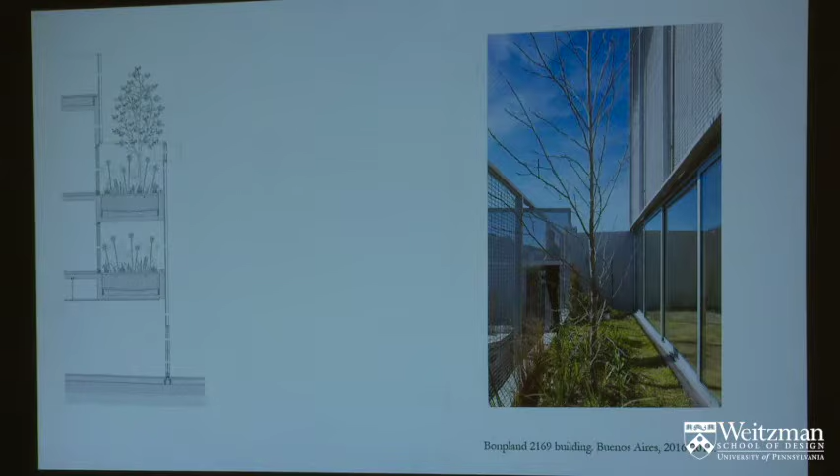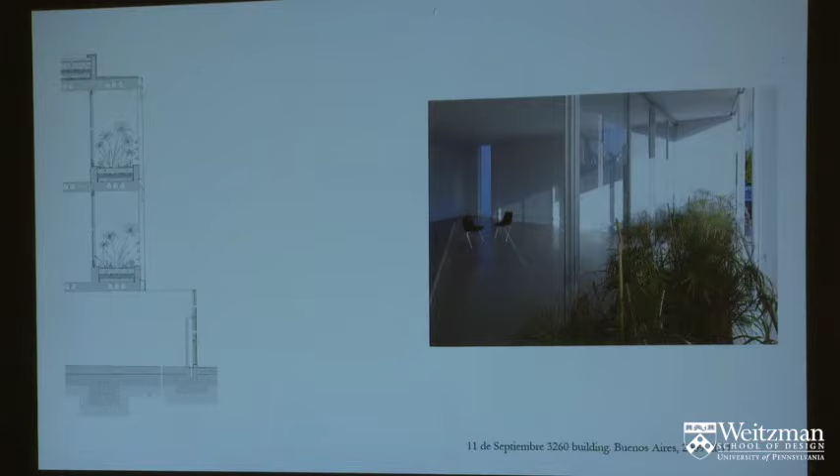Once the glass recedes from the perimeter, the outside envelope is no longer responsible for the waterproofing. This means it can react more freely to other exterior conditions. In this west-oriented building, a set of roller screen shutters control the sun radiation and the structure of the facade. It creates a kind of mixture: geometric Cartesian proportion from the outside layer, and picturesque shadow from the elevated gardens.

In this case, the translucent glass panels are blurring the presence of a big avenue. They work as a sound barrier. They calibrate the atmosphere of this elevated garden while helping to connect it with the park in front. You cannot see the windows from the outside. The building starts to look like stacked, semi-covered spaces.

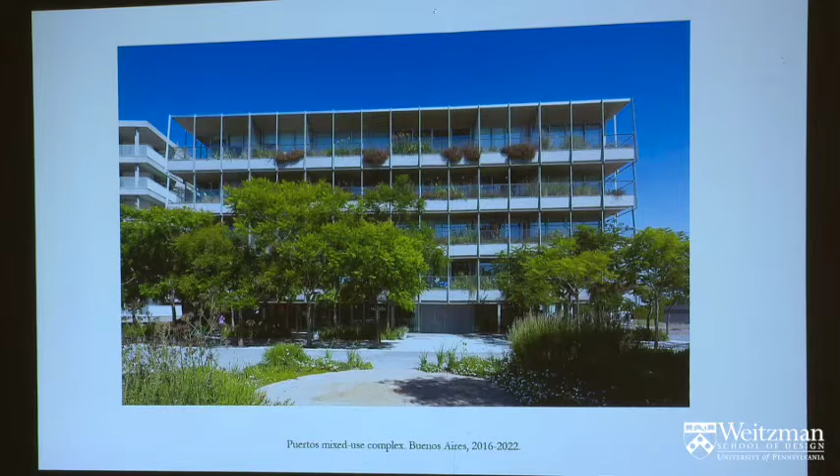This is a building that is again in front of a park, but with no avenue in between, so the exterior envelope becomes almost nothing. That almost nothing wraps all the plan and creates circulation and also the expansion of the units. With just a galvanized steel wire and the vegetation coming outside the building, the continuity here is more direct.

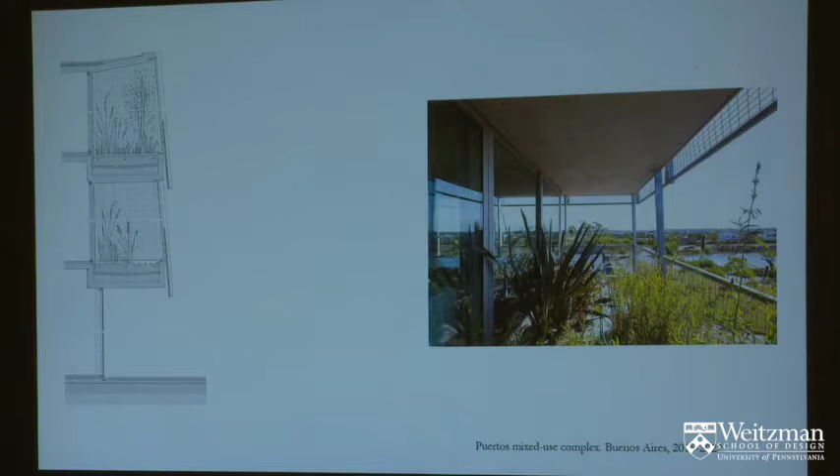I believe that architecture is a form of knowledge, otherwise we wouldn't be here. We have thousands of years of accumulated experience, through which we distill a great catalog of design technique. So I believe that progress lies somewhere between disciplinary knowledge and contingency.

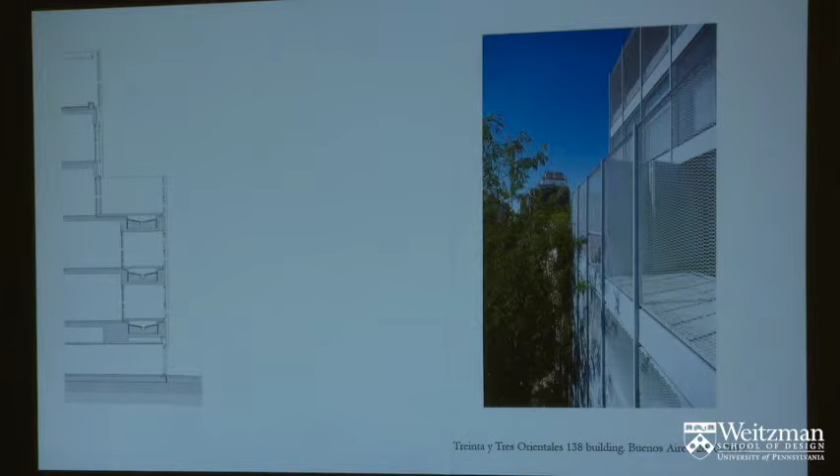The sun radiation, the heavy rains, the safety issues in South America create what we call this curtain wall actualization - what we refer to in the office as a ventilated curtain wall. That creates a lot of versions of this transitional space that help us create this new contract with the urban landscape.

I wanted to share this parking silo to conclude my explanation about this contract of architecture with the urban landscape. I'm using the word contract because it creates a two-way enrollment. In this artificial crust, in this density, architecture doesn't only relate to the landscape, it becomes the landscape - not only with gardens, because the continuity can happen with anything, and also, as we see here, with cars.

This is a truly ventilated curtain wall. It's a situation where you not only have to be careful with the water, but you have to let the air of the cars go through the building.

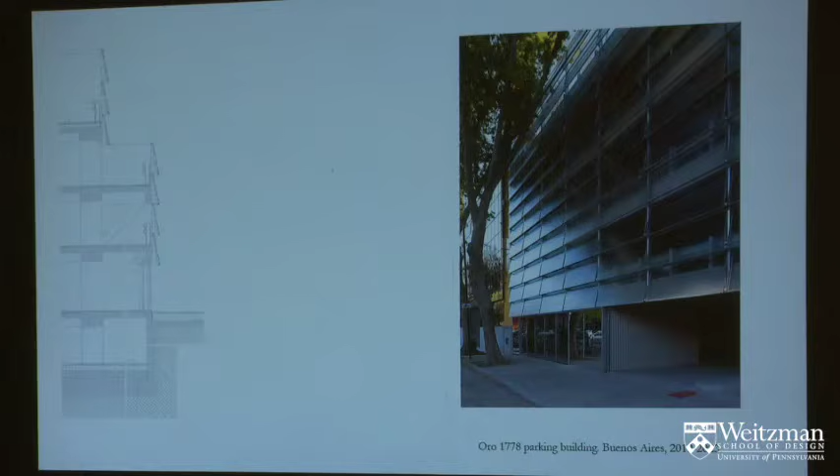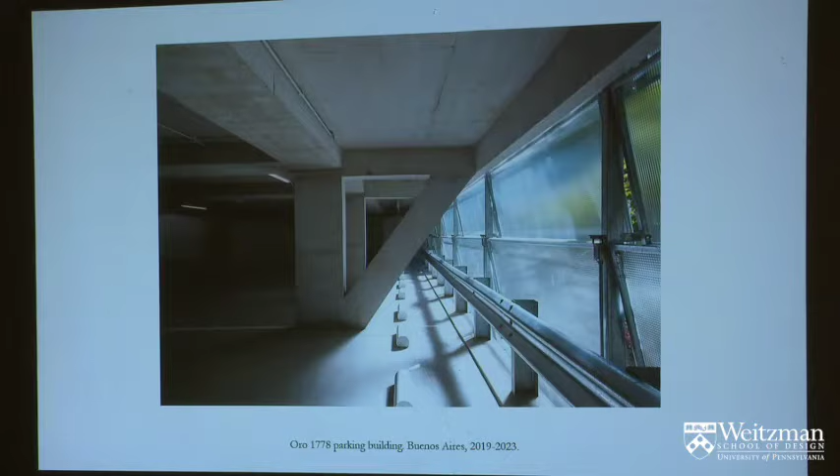It's a building that has only two elements, support and envelope, mostly built out of standard catalog materials. This helped me illustrate the idea that architecture can be a filter to relate ourselves with the world.

The second contract I want to present focuses on the relationship with the ground. We're used to thinking of architecture as the discipline that formalizes limits, shaping the division between public and private space, usually with a wall, a fence, or a simple step that defines control over the land. But in this dense city, architecture also has the power to blur that boundary, fostering a more permeable urban landscape, a more porous city.

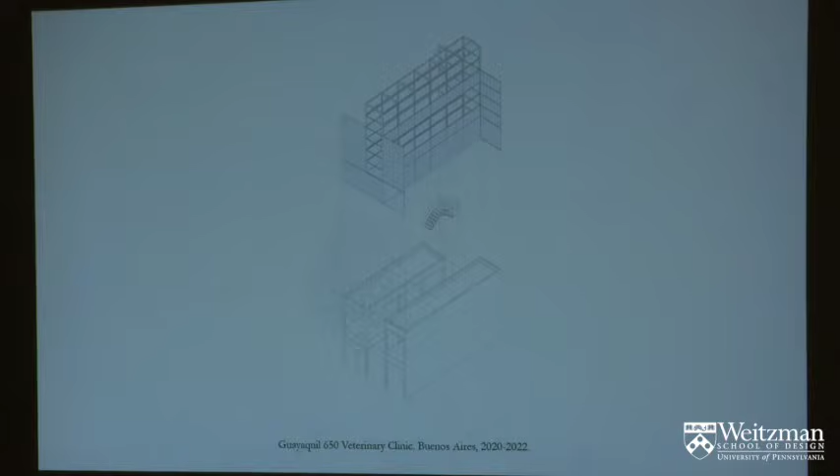This veterinary clinic connects the street and the center of the block through a new passageway. The story starts with an old house that we managed to maintain by only demolishing the central bay to create that passage. The passage is aligned with an existing tree, and as we see in the picture, we wrapped the existing building with corrugated metal sheets to resolve the insulation, the waterproofing, and the new identity of the veterinary clinic.

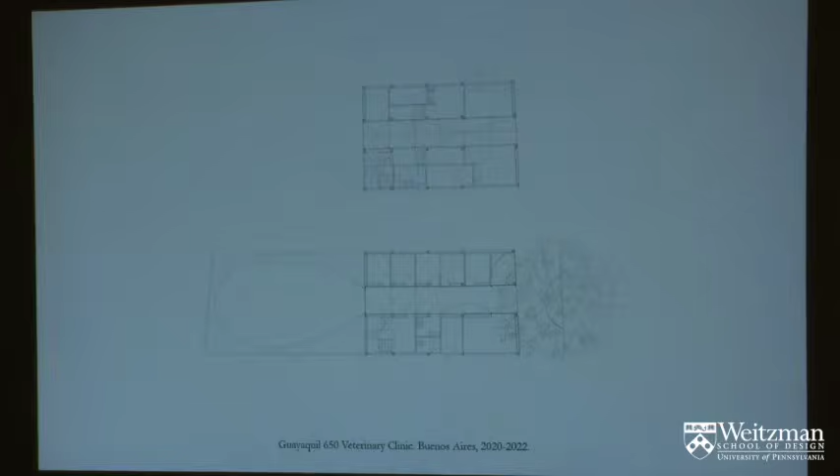On the ground level we have all the consulting rooms, and on the first floor the X-ray laboratory and operating room. But most important is that we have a patio, a new garden for a new community.

This is how the building looks from the outside, and this is the interior. It seems like the urban ground goes through the building, creating a permeable space protected from the rain with vegetation and a rough floor designed for pets. The consulting rooms and the rest of the veterinary clinic open into this passageway, and at the end there is a garden for a community of dogs and humans that demand greater spatial representation.

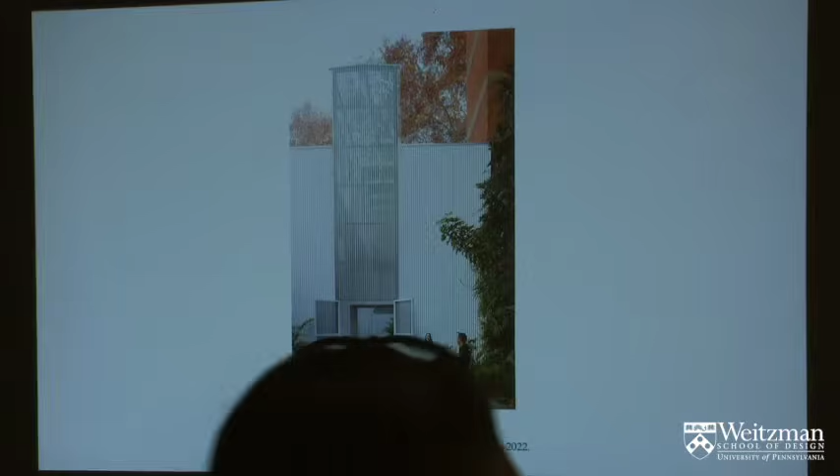This building happened in Buenos Aires because Buenos Aires is one of the cities with the highest dog-to-population ratio in the world. Yeah, we discovered that through this project.

Continuing with this contact with the ground, this horizontal and permeable pavilion has a dual responsibility. On one hand, it has to formalize the perimeter of the Di Tella University campus, and on the other, it must connect the academic life with the neighborhood.

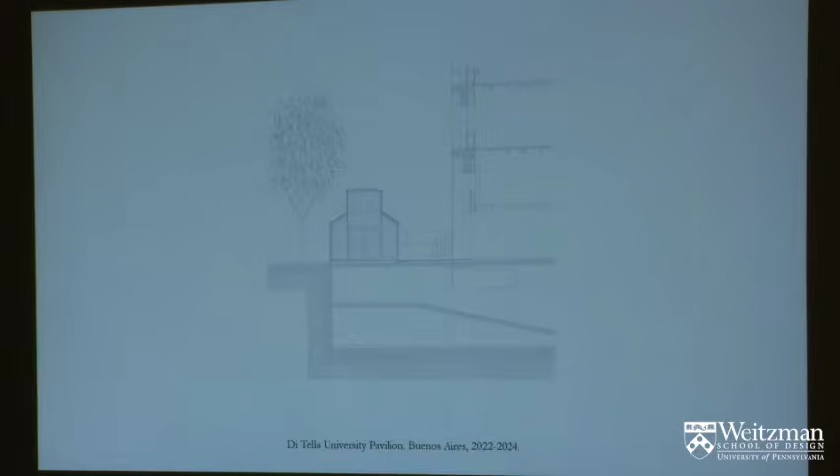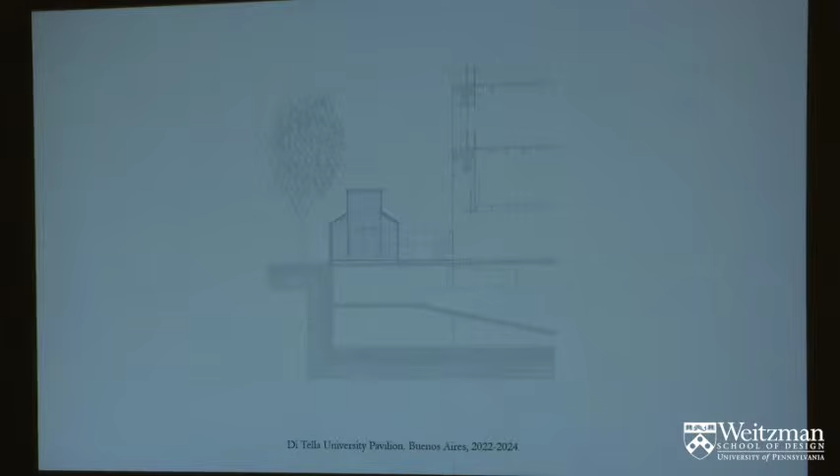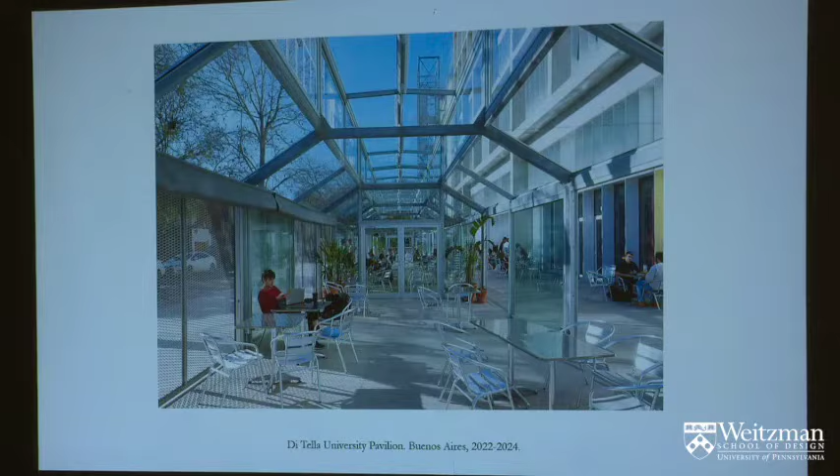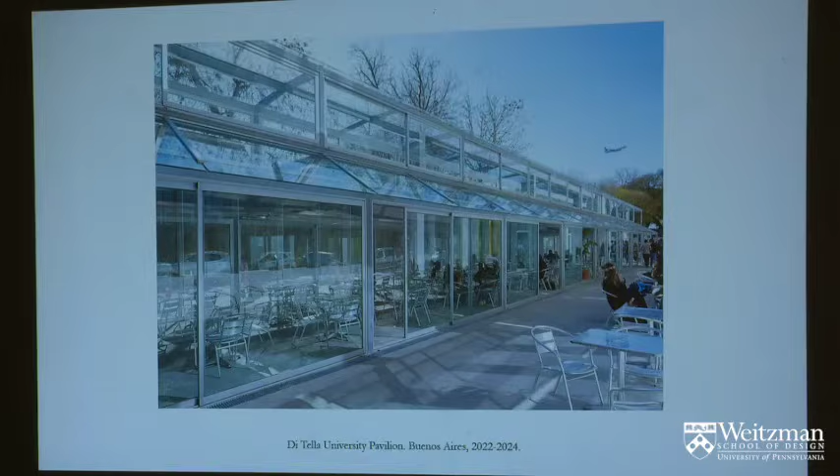The objective of this kind of architecture is to intensify the connection between the parts, promoting the integration of the university with the daily life of the city.

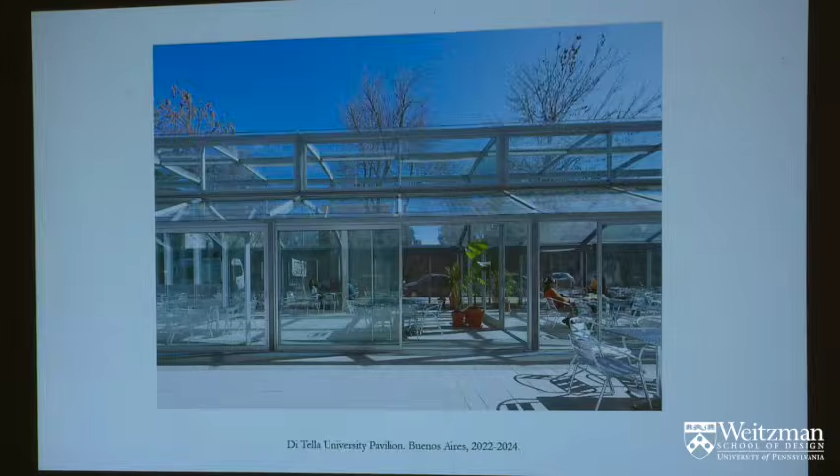It's a very systematic and pragmatic structure that offers itself as a meeting place where exhibitions like the one we see here can take place — moments where neighbors, students, and professors freely cross the property lines.

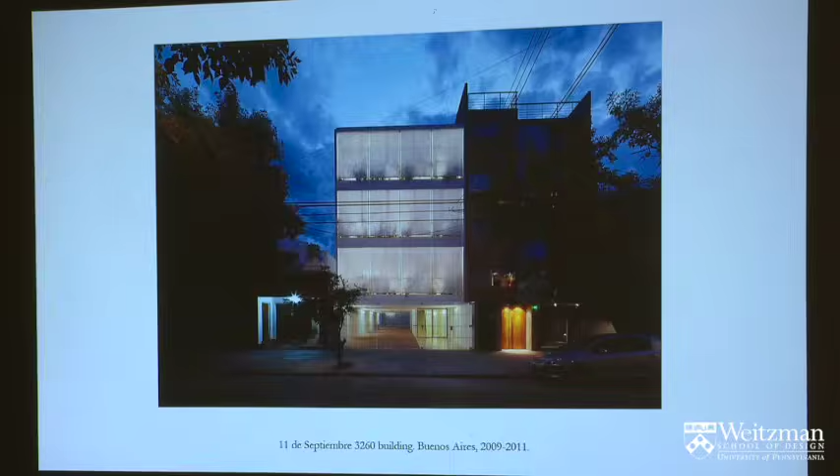As Le Corbusier announced a century ago, a car can be a good agent to erode the ground floor. So even in housing projects like this, without being accessible to the public, the views and the airflow improve the quality of the city. In buildings of this scale, cars have a huge influence on the ground floor organization.

So our approach is to find a way of coexistence. The programs in this case do not have a material translation — there's no specific floor for a pedestrian path, no specific kind of floor for cars. Everything is melded into one single space.

Because of that, because we treat cars as big pieces of furniture, you still have the biggest room of the building, which could be useful for so many things other than we expected.

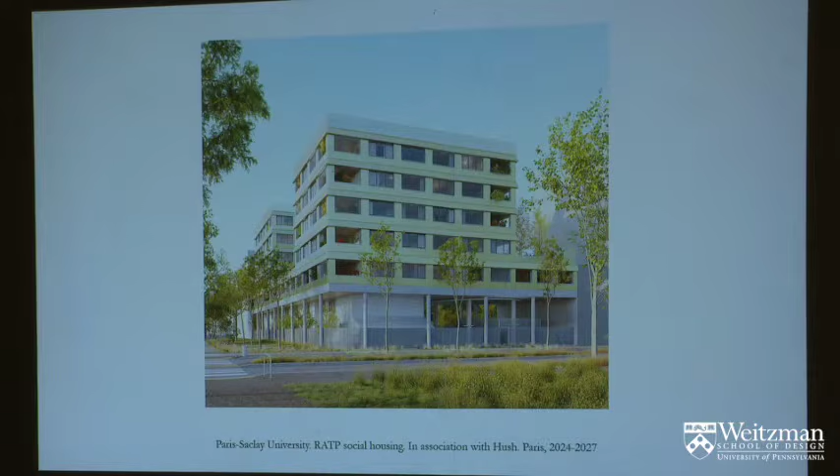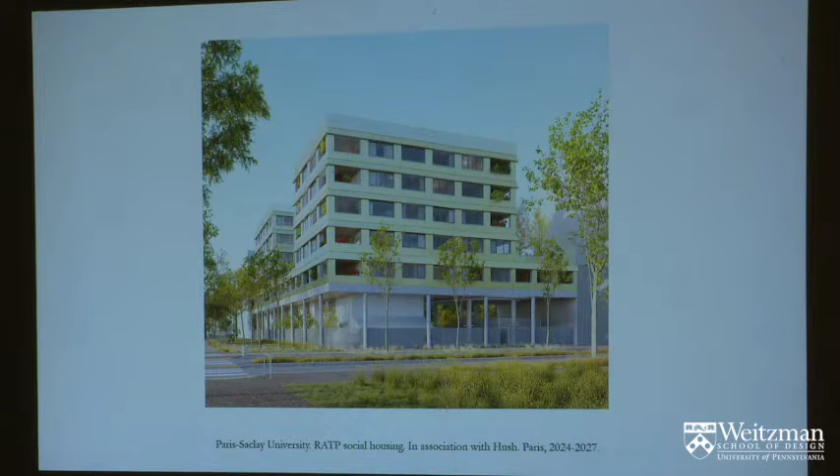So this is a social housing project that we are doing for RATP in the university campus of Paris-Saclay. As you can see, it's a corner building that has two different situations. In front, there is a boulevard that connects with the Paris city center, and on the side, there is a pedestrian street that is fully gardened.

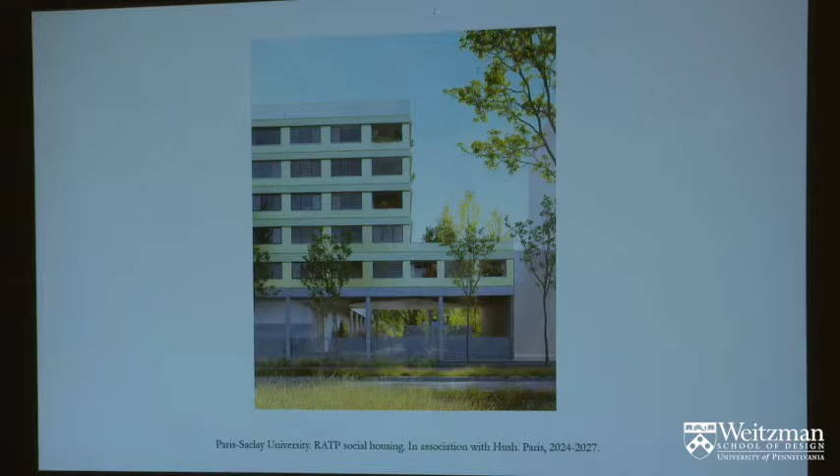So from the boulevard perspective, the building rises up in order to connect a productive field with a communitarian garden that you can see here. This is the entrance of the building.

So the community garden is in connection with the landscape, with the outside. But to the right of this image, there is a fence that anticipates another approach.

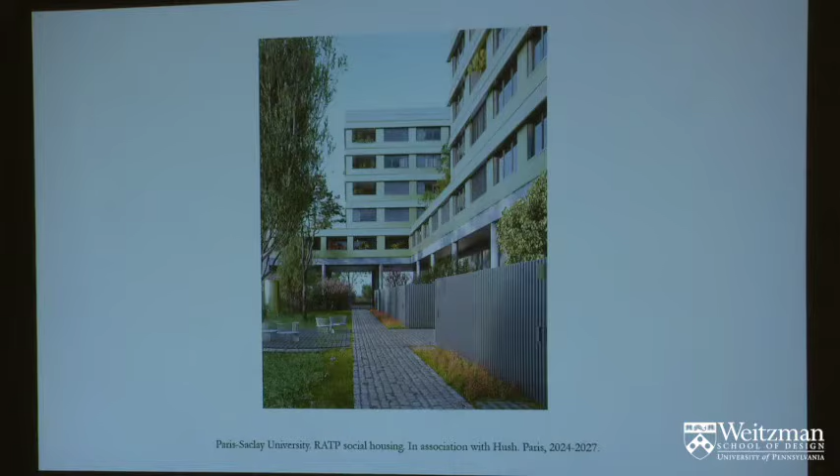But as you can see here, there are a lot of row houses that activate the pedestrian street, avoiding having only one entrance door and creating and promoting a more physical relationship with the street, with the public space.

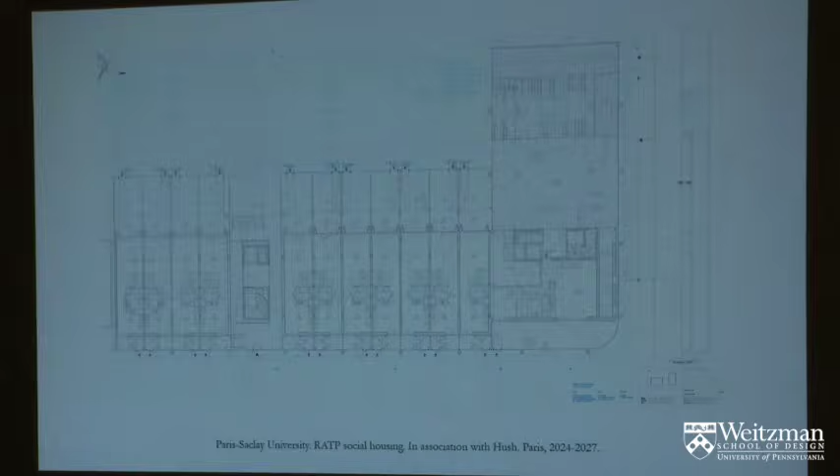This is the other side of the building, with all the entrance doors and all these patios that lead to the houses behind the building.

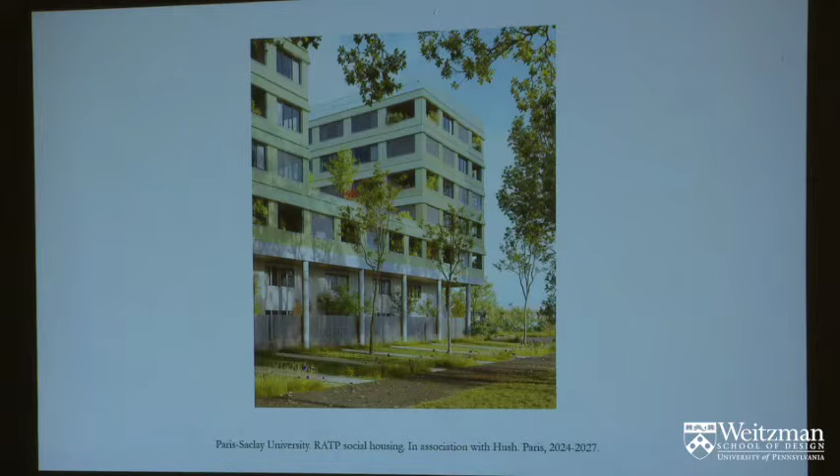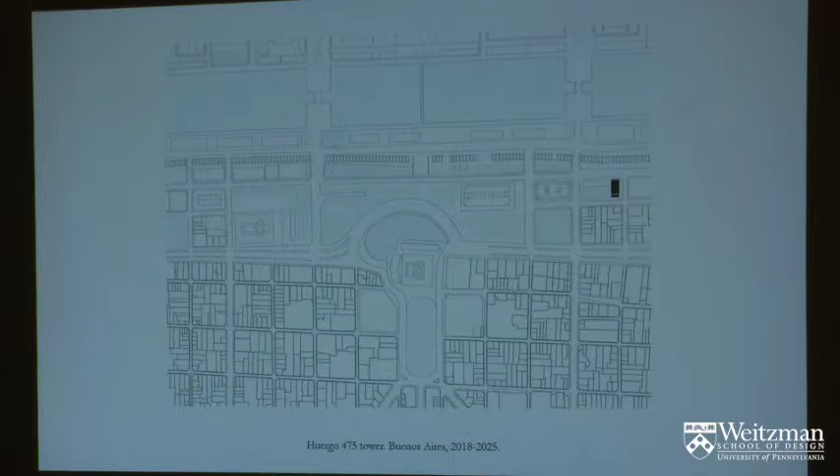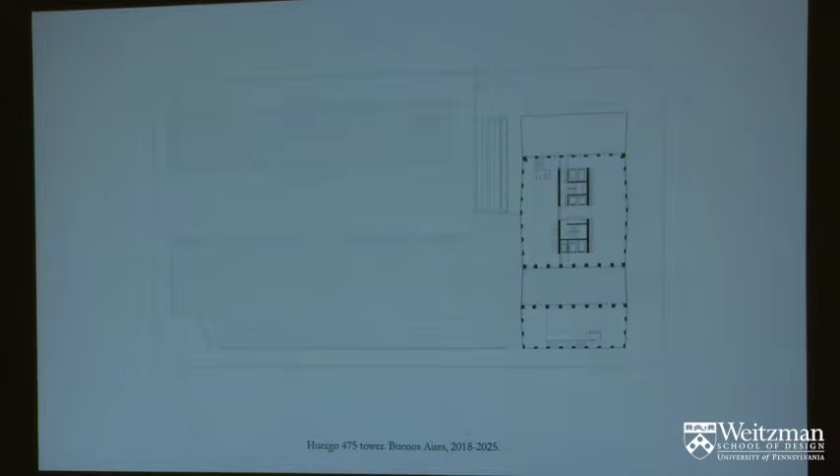They have retail space linked to the public plaza. They have a hall, and of course, there is this passageway that helps us improve the relation with the ground of the city.

And once you pass through, the passage also has an impact on the sidewalk with a specific part of vegetation, telling you that the city is not just divided by property lines, but is a more continued space.

So the last contract I want to present is the contract between architecture and the sky. We focused on architecture and landscape, architecture and the ground, and now it's a moment to look at how it relates to the sky.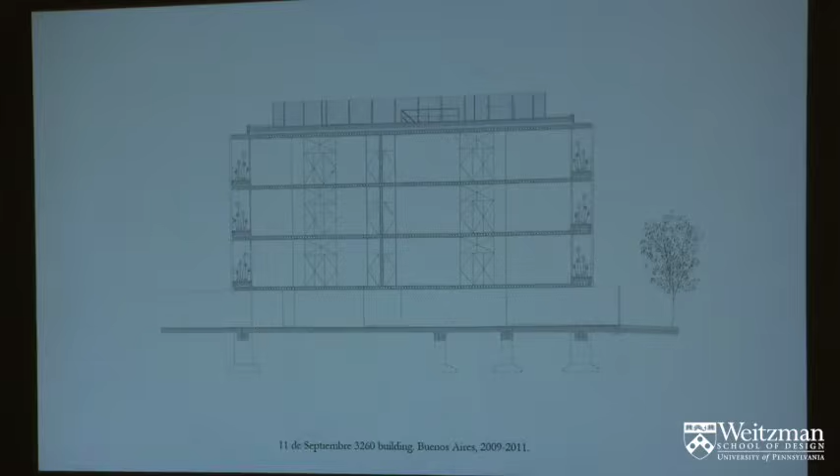And I'm not talking about topographic metaphors at all. We can do it with a very simple section as this one. We must reclaim our right to inhabit the upper part of the city, its surface.

Here, too, we see the same vacant territory, antennas and tanks that insist on the same technical contract. A church in the back appears, materializing a symbolic contract between architecture and the sky.

But the small, almost evanescent apartment building proposes a different kind of relationship with the atmosphere. It's a relationship mediated by a permeable room, made with sunshade awnings, metal mesh, and concrete floor - a compendium of ordinary material capable of constructing a new idea of luxury.

An idea of luxury that is no longer associated with exclusive locations or sophisticated materials, but with the vitality of living atop of this new topography.

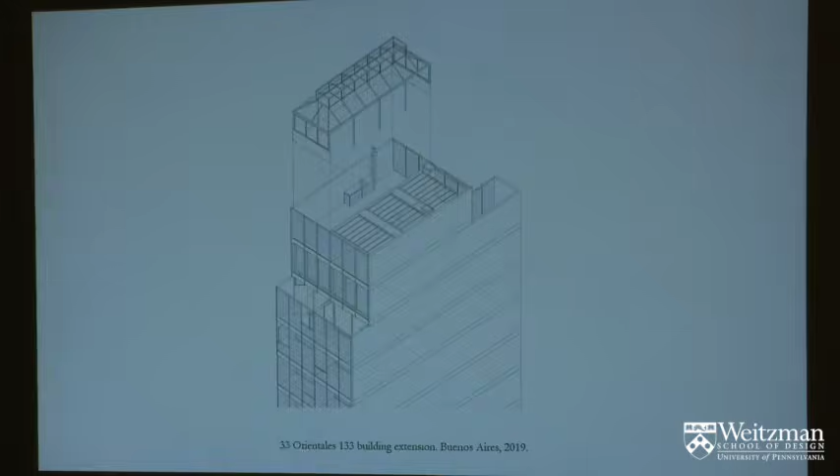Again, look how the city looks like, not too different from my view from the hotel. You see water tanks, installations, and that small pavilion speaks about the possibility of being in direct relation with the sky. How easily we can change the way we relate to the weather and what kind of possibilities that could allow us. This is a way to finish a very small apartment, and look what kind of furniture are mixed in this new envelope.

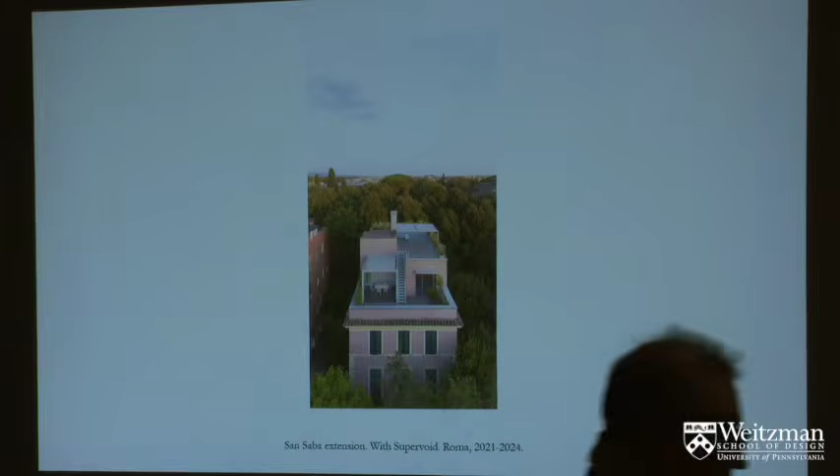This same attitude that we built, at least 10 pavilions on top of buildings, and someone saw it from Rome, and this is an attic that we finished in Rome a few years ago, not so far away from the Colosseum. That means it's a global thing. It's not something that you can see only in the States or Argentina.

We are treating the roof space as a technical one, and now we are slowly learning how impressive it could be to spend time and manage to see the city from a totally different perspective. But also, every step back that is required by city regulation becomes a possibility to insist on this last contract.

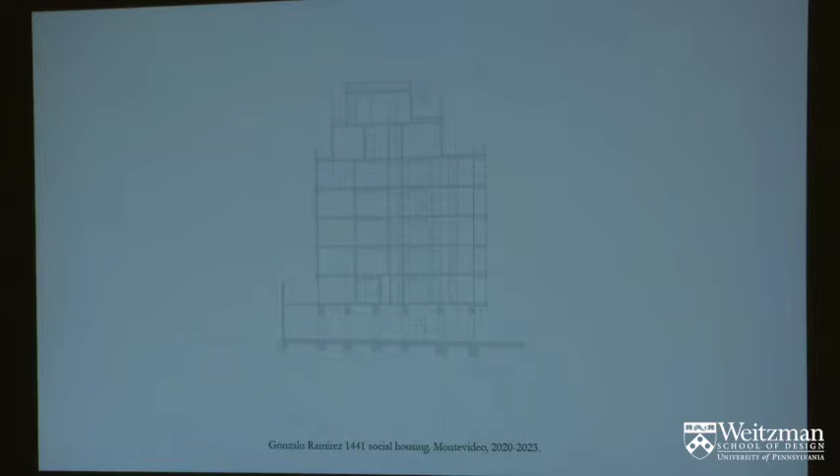This is a social housing project that we finished in Montevideo, in Uruguay, where a very economic apartment can take those places as terraces or even share spaces for the community.

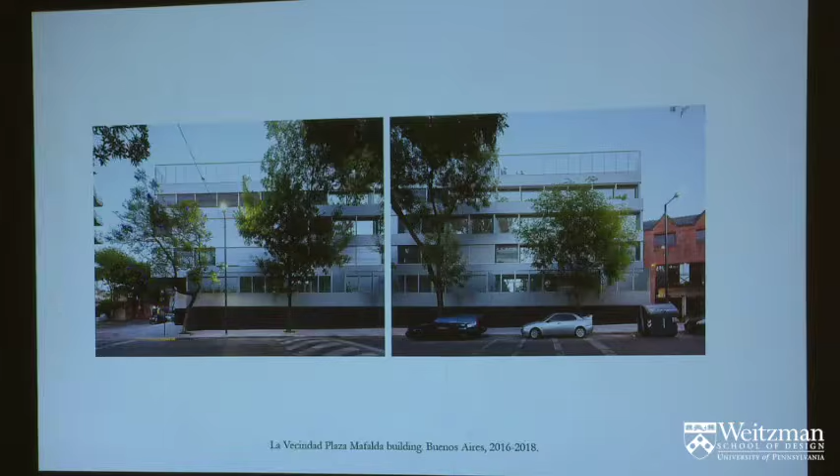In this long block of Buenos Aires, the presence of the tree forced the block to step back and create different spaces, different roofs that, as we can see in the section, are treated as leisure space. In this section, there are two houses superimposed.

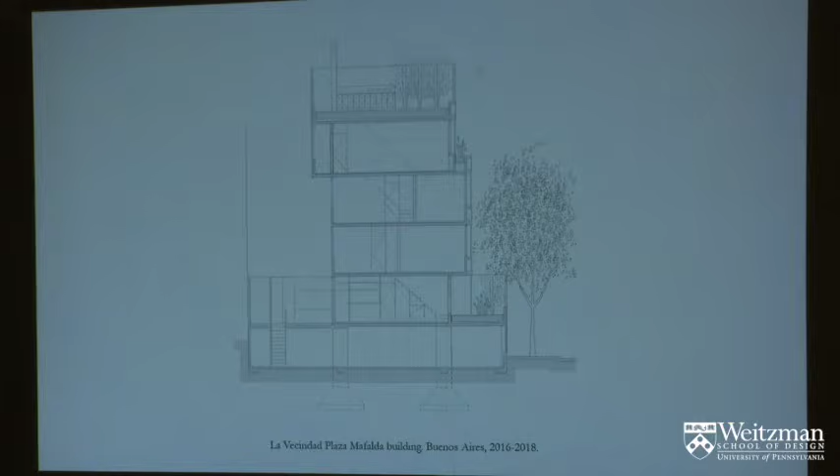On the one on the bottom, you can see two different kinds of patio linked by a social space. And on top of that, the social space is linked to the terrace. So that means every shift of the building creates a place that could be useful or change the way we build apartments. This is the circulation.

You can see both of them, no? The one on the first floor, the other on top. And that's how you get inside those apartments, by a patio that has a barbecue. That's a religion in Argentina. And then you have this space, and again a garden on the other side.

And the roof of that building, of course, is another garden in complete relation with the tree.

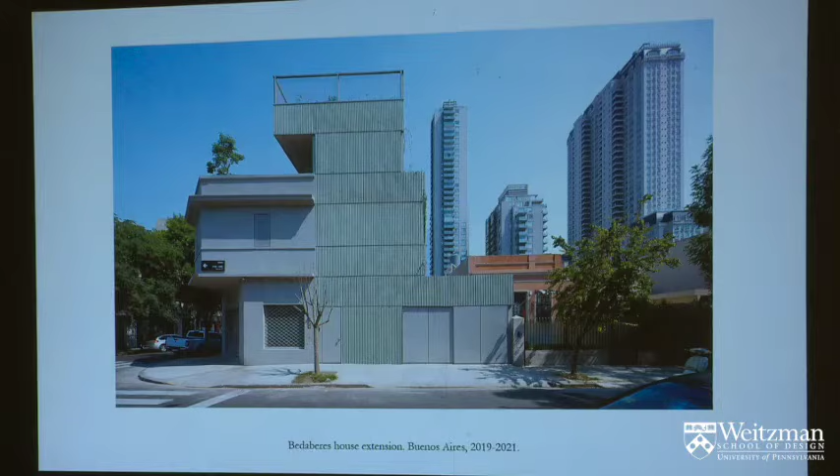The first floor is occupied by bedrooms, and on top of it, the existing roof of that house becomes an expansion of the social area with the kitchen and living room. And on top of that, you have a swimming pool that works as a roof.

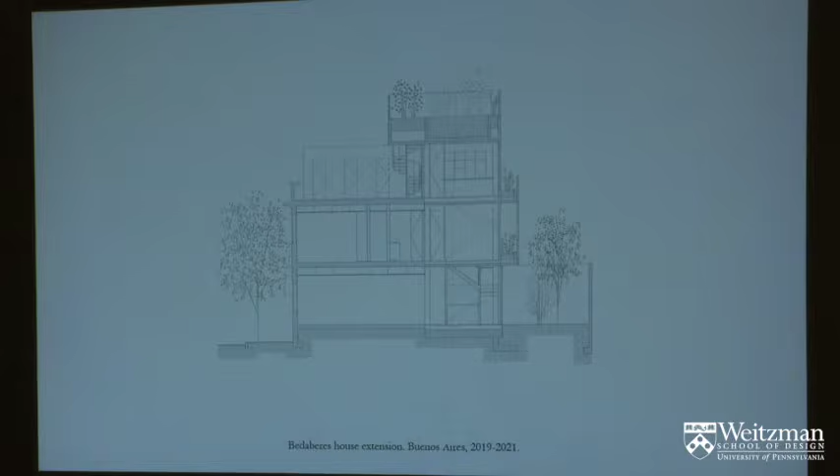That is the same pavilion. When you turn around 45 degrees, you see the receded protected houses on the right and the existing pavilion in the corner.

That's the private garden, very unique in this situation. And this is the existing technical roof, now transformed into a platform that expands the kitchen and living room. And as you can see in the thickness of the slab that finishes the situation, you can understand that there is a swimming pool that celebrates being in contact with the weather, with the atmosphere, even in a very dense situation like Buenos Aires.

And this is the picture I like the most, because this is the power of architecture. You see the pictured roof, you see the water tanks, and you have the possibility to imagine that you can enjoy it, because now we have the technical elements to do that. It's not heroic at all.

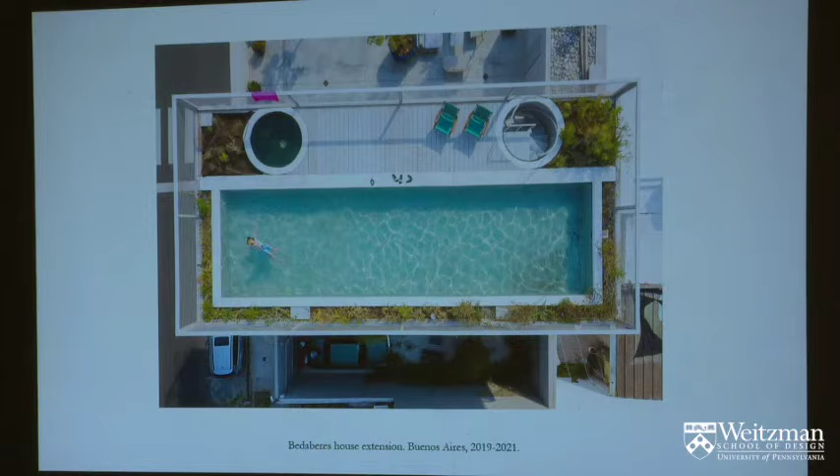So you can have a swimming pool floating in the middle of the city, surrounded by trees, and you can feel that this is a desire that is not just for a few people. Because when we took the picture, we noticed, look at the top left corner, there is a small swimming pool over there.

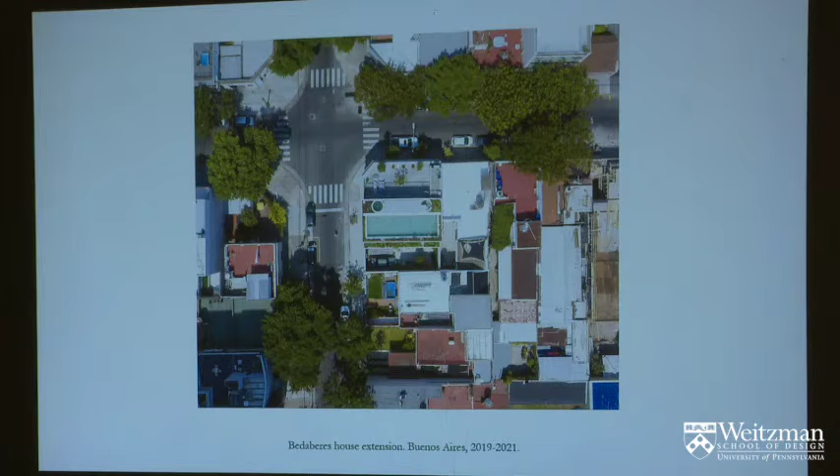We need to learn to see all those roofs as air plots. That's, I believe, the future to make the city more desirable, and it's an idea that's not only linked to wealthy people, because if we move to the opposite side, we are using this same attitude.

We believe that can be applied to the toughest neighborhood of South America. This is Chacarita Alta, in Asunción, Paraguay, a work we did together with Moss and Equipo de Arquitectura. In this very tough scenario, we were expected to do a block with an elevated passageway and circulation, and we managed to break that block in order to relate to the informal housing, to the grain of that scenario. Instead, we created a lot of entry doors and this complex element that allowed us to create terraces that can enjoy the air and the city.

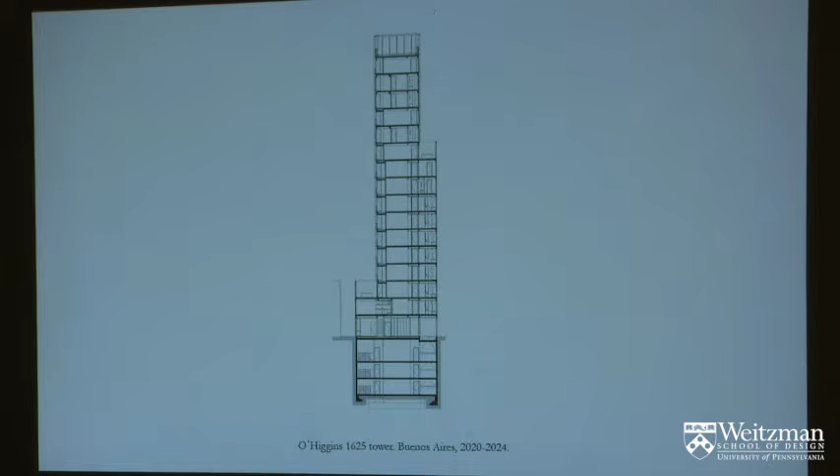Even moving to a wider scale in this tower, the city regulation forces us to shift the tower in two directions, and every time there is an exceptional moment, as you can see in the section, we managed to create situations that expand the apartments, and somehow you can call it more like a house than a typical apartment. On top of that tower, you have a garden with views and being in direct contact with the sky.

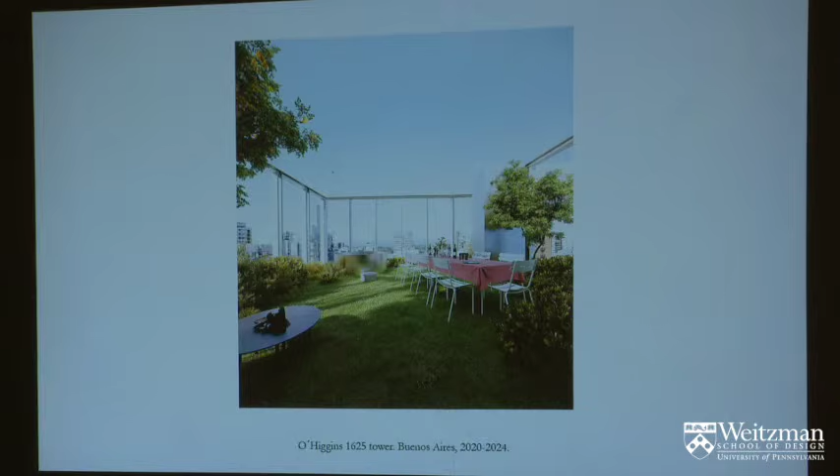This is Huergo Tower. I showed a few pictures a few moments ago, but I want to explain it a little more. It's located on the border between the oldest and the newest neighborhood of Buenos Aires. It is a tower with a certain attitude because it generates its form from the interaction with the different scale of its surroundings.

I like to finish the lecture with this project, which summarizes our way to relate with the ground and to the sky. It's a 120-meter high tower with more than 500 units.

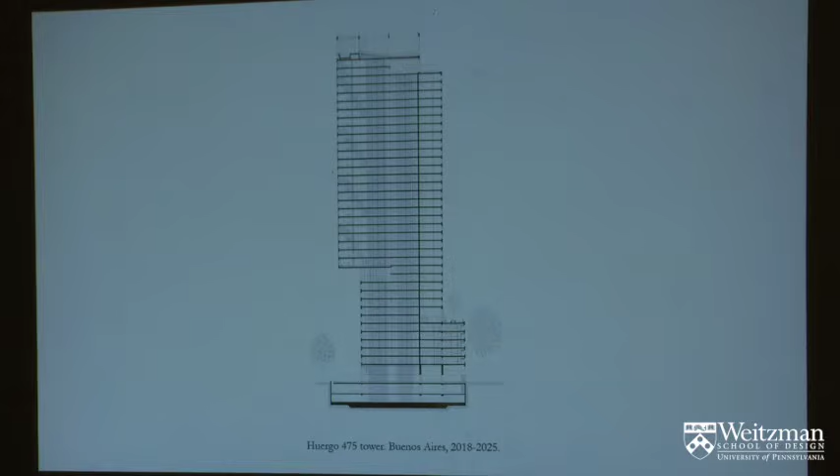We saw the passageway on the bottom, but if we follow the section, you will find sports uses at the height of the treetops. You will have learning facilities under the cantilever, and communal kitchen and a terrace on top. Also, the laundry is positioned on top, and above that, there is an open garden and a swimming pool.

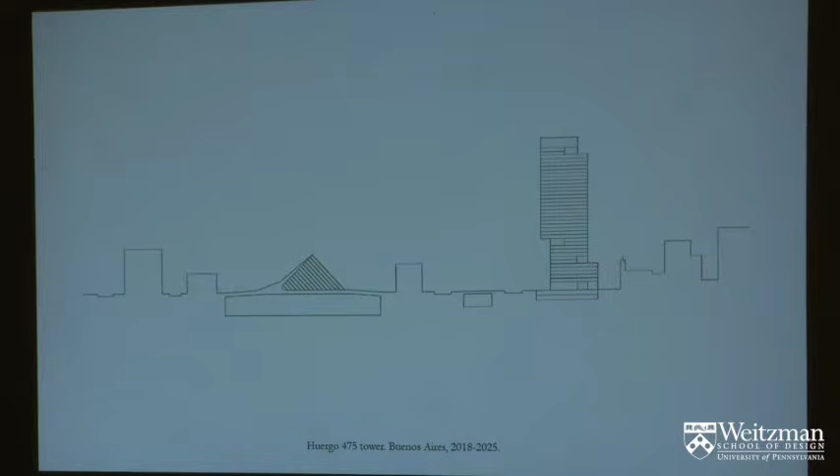With this side section, you kind of understand how the tower generates its form. It has an objective, a position almost like a body position. It looks to the Rio de la Plata, and at the same time reduces its scale by meeting the city fabric, without changing the formal aspect. There is no plinth and tower—it's just one single structure that manages to change its form in order to relate to the different scales of the city.

There you can see how the trees are higher than the building, and how the retail space activates the street. From another point of view, you can see how the tower manages to reach the height of the existing city fabric. Once you get inside, you see the shared spaces such as the sports area linked to a terrace, that links to the trees, linked to the city fabric.

When you see it from the river, you can see how the tower overhangs the existing docks, and over that cantilever space, there are study and work areas looking through Rio de la Plata and Puerto Madero, the newest neighborhood of Buenos Aires, and above that.

You have this huge terrace to see the sunset, because the views from Rio de la Plata are completely dark—at night you see nothing—but this terrace looks over the whole city, and it's a spectacle with the sunset and the city lights. These five hundred units can use a shared kitchen like this, or do their laundry next to this terrace.

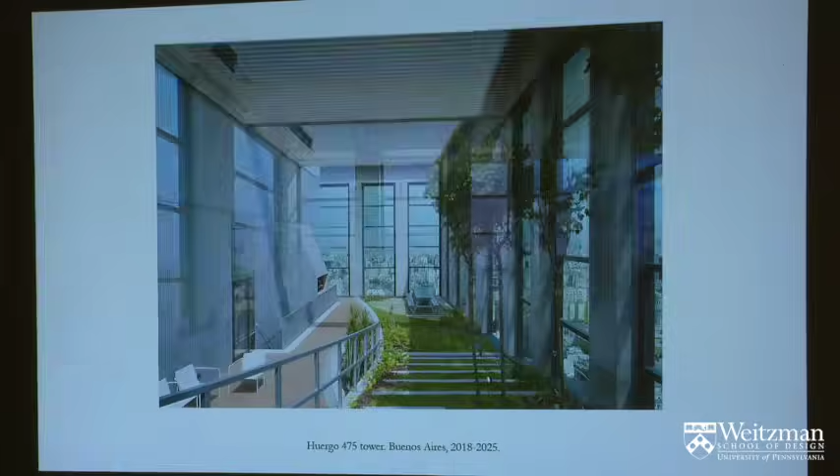But on top of that, you can connect with the stair you see there, and then you finally get to this terrace, where you have trees. Again, the barbecue is an important part of this equation, and from that, it's an open space where you can finally be in direct contact with the sky.

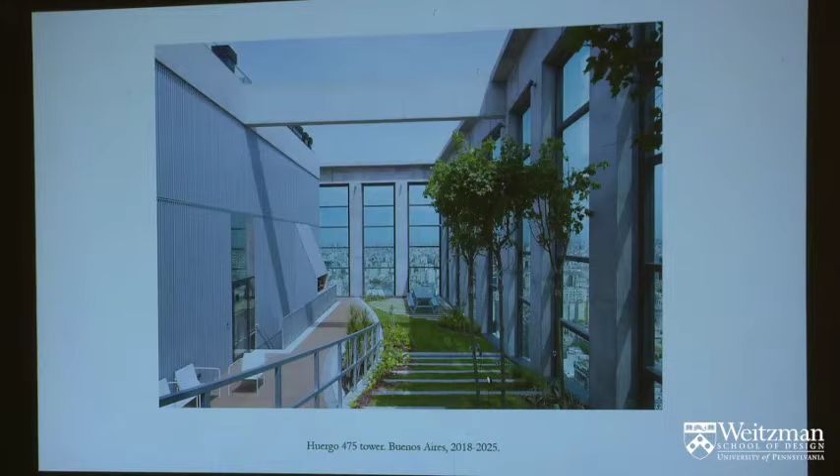Those gardens on one side and the other of the tower are connected to this swimming pool, which is at the end—this is kind of a vertical village, because all that people also share a pool in direct contact with the sky, located 120 meters high from the ground, with the Rio de la Plata in front of you.

This tower highlights the same equation that drives the city. It can stack all these shared spaces because it concentrates a high density of inhabitants. This is exactly the same in cities.

Today, we can gather in an auditorium like this, surrounded by public parks, transportation networks, and facilities like a museum, because we are in the city center of Philadelphia.

Perhaps looking back to our relationship with the sky, the ground, and the cityscape will help us formulate our desires more clearly. It will inspire us to imagine what kind of architecture can navigate a tremendously challenging agenda while still offering stimulating scenarios.

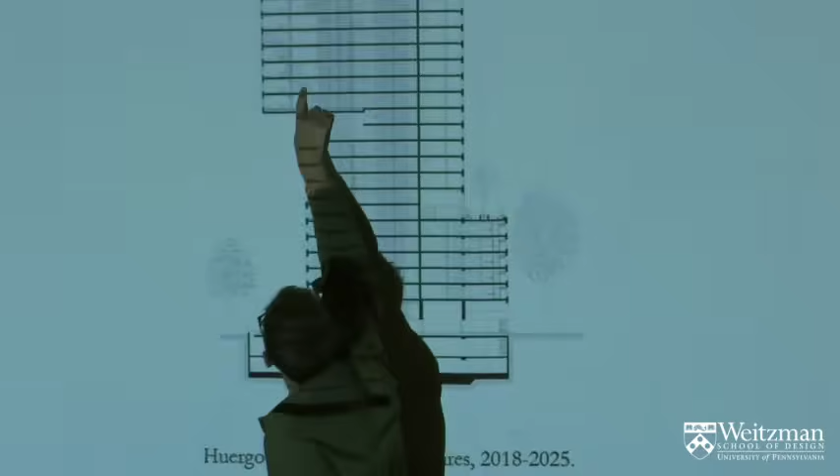Let me go back a bit to explain more, to the section of the last tower I presented. This is a tower with an 11-meter cantilever over here. Yeah, and it is that cantilever here — it's very blurry, but you can see those diagonal beams, braces, every 5 levels that go down to the core, and also the facade works as a Vierendeel beam. But when you see the building from the outside, you cannot understand how it holds.

We choose — of course, if we expressed those beams and everything, it would be amazing, and I love that kind of architecture too, I have to say. But I guess in our work, we choose the rhetoric of the ballerina rather than the athlete. And yeah, that could be the answer.